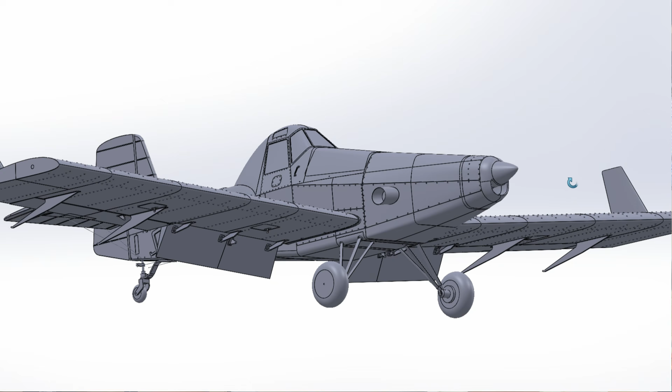In this video we're going to start working on the Thrush, which is a project from Ben Jansen. He gave me the challenge and I want to explore some other stuff to print. And we're going to work on the Harrier.

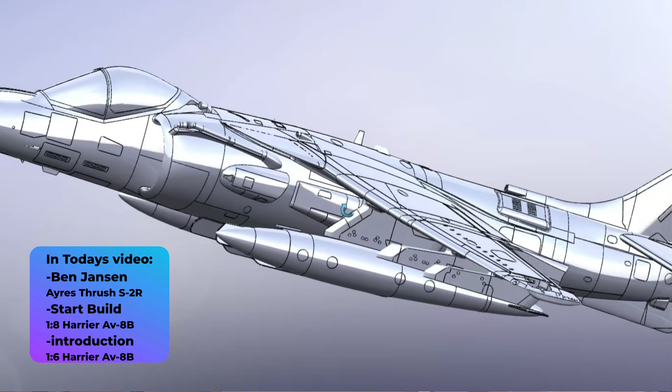The Harrier is going to be a super cool project. I already printed some parts. This is going to be the AV-8B version with the longer radar nose, and it's going to be a 1:8 size, but also a 1:6 size, which will run on a very big EDF.

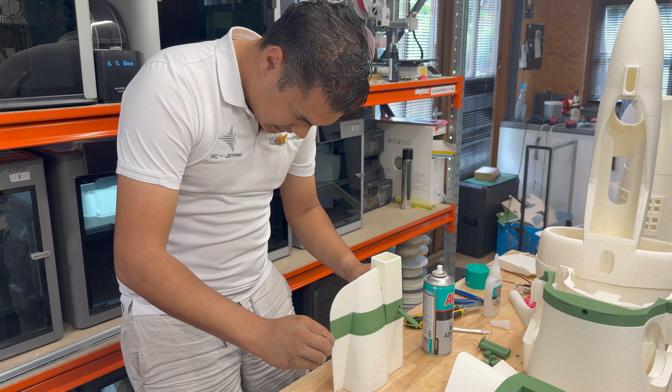And here we go. So, to tell you something about lightweight ASA: it's super lightweight, but also brittle. For all the mechanical parts, I decided to go for PLA CF, which makes it super strong on the mechanical parts like landing gear, flaps, or moving parts.

So for all those parts, we use PLA CF. And for all the lightweight stuff, which is actually paper lightweight, it's just ASA, because the Harrier is a really difficult project. We need to keep it lightweight.

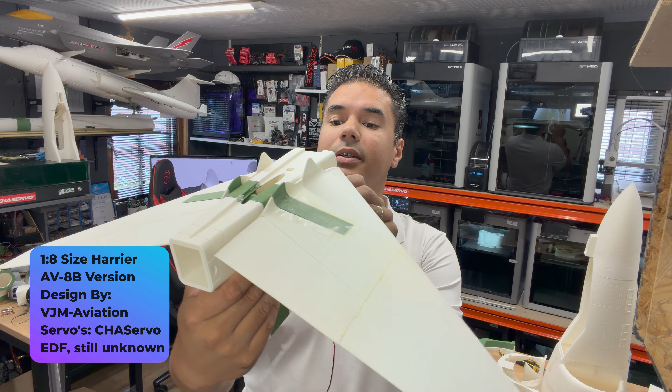So the tail is coming quite nicely, elevators, and they are really super strong. We're going to use the CHAServo DS09. Quite happy. Okay, let's continue gluing some more fuselage parts.

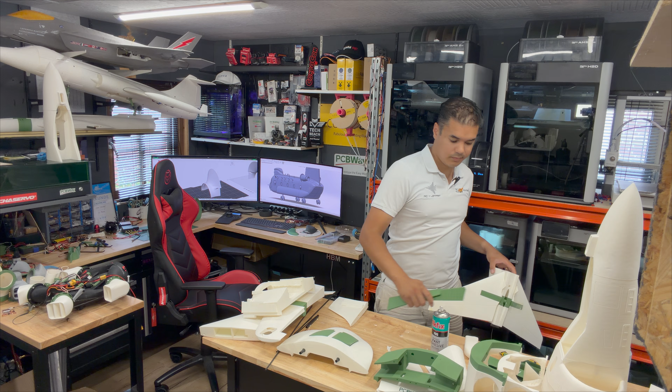Okay guys, we came slowly to a stop because I made some small mistakes. For example, this piece of the wing needs to be carbon. Six kilos of the Harrier model is hanging on this small piece of lightweight ASA.

So this piece needs to be printed out of carbon fiber. This part is super strong. I'm really happy because the tube goes all the way down into the core of the wing. So this part is actually quite strong, but this back part, yeah, I need to print out of carbon fiber.

I'm happy that I still didn't glue it, but overall, she's still very lightweight. And yeah, that's about it.

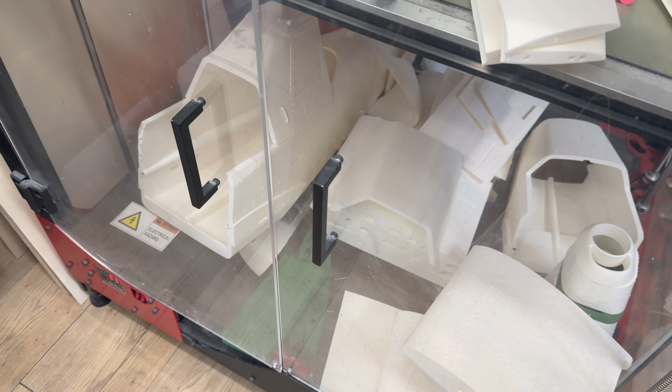Okay guys, we're going to use aluminium CNC cut landing gears. We need really strong landing gears because these are the side legs, and they handle a lot of side impact, so they have to be strong.

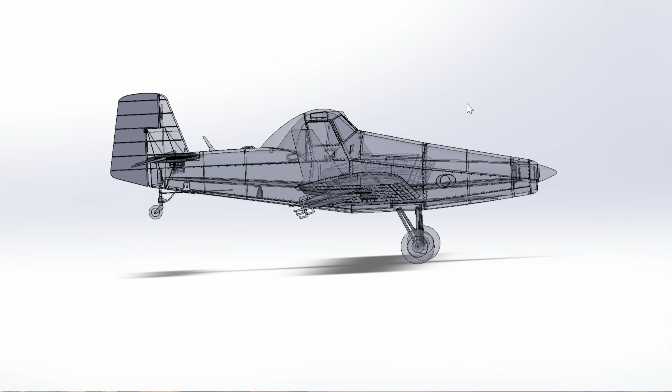Okay guys, let's continue with the build of the Thrush. This is a project from Ben Jansen, and look at the quality of the details. It's going to look really awesome.

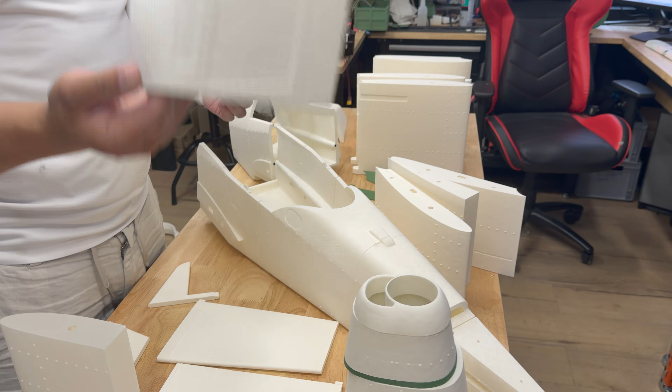We're going to print this plane in ASA material. Lightweight ASA can handle the heat, it can handle UV, and it's quite ideal for sanding easily and making a nice paint job on it.

So let's start gluing these parts together. Yeah, let's see how it works out. Cool.

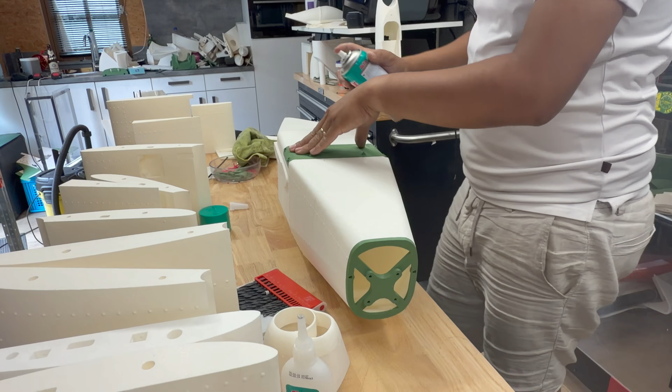So guys, last night I printed all the parts I need to continue with the Harrier build. I know you're all waiting for this project, but the improvements and the mistake I made yesterday are now solved. So this part, for example, the whole entire Harrier is going to lean on this part because this is the fixture of the wing. So let's see when they are finished.

Okay guys, and this is the result of the fuselage build. So next week we're going to continue with the wings.

We're already on the next day. And what do you think about my t-shirt?

That's super cool. So we're going to continue with the Harrier because I printed a lot of parts overnight. But guys, look at the details of this truss model. Cool, eh? So let's continue.

So let's continue with the beating heart of the Harrier, which is the Pegasus. I really love to build this Pegasus as a scale size, as a scale mock-up. It has to be the real thing. We're going to use a big Schübeler for that, which is the 128mm 14S setup.

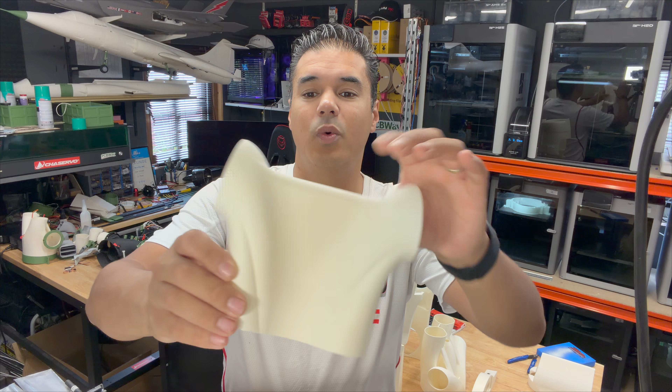I asked you guys on Facebook if lightweight ASA should work, and most of you commented yes. I made a new design which is way more tougher, way more stiffer, but super lightweight compared to carbon fiber printing. So again, more efficiency.

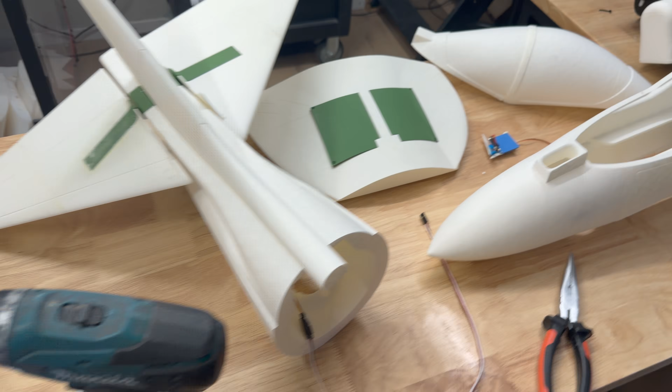So these are the parts which I have so far. Some parts printed overnight. To be honest with you, this is already my second prototype. The first one had some issues with integrity, and I will give you some footage about that.

But anyway, the main landing gear has to be printed with carbon, since ASA is mechanically not strong enough. So also you need to improve the holder for the front landing gear. More about that in a minute.

So it's always great to have support from Richard. Yeah, he's helping me with the KK2 board. We're still going to continue with the KK2 board, but in the future we will swap to iNav. Okay guys, Richard, great job. Cheers buddy.

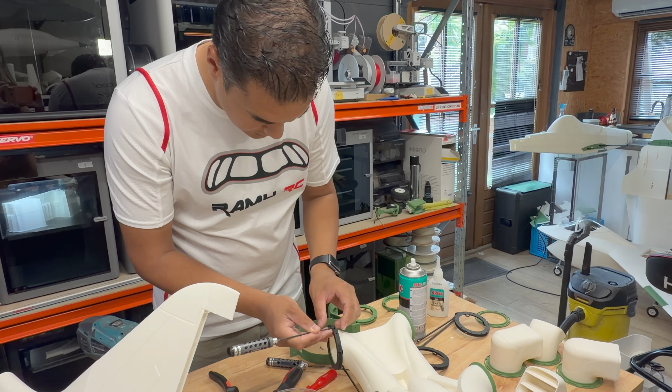Guys, we're going to install over 20 ball bearings to make it operate smoothly during the rotation of the nozzles. This is my concept, how I've done it for years. If you look really closely, those bearings are angled at 45 degrees. And the more pressure you put into this Pegasus concept, the smoother it will run.

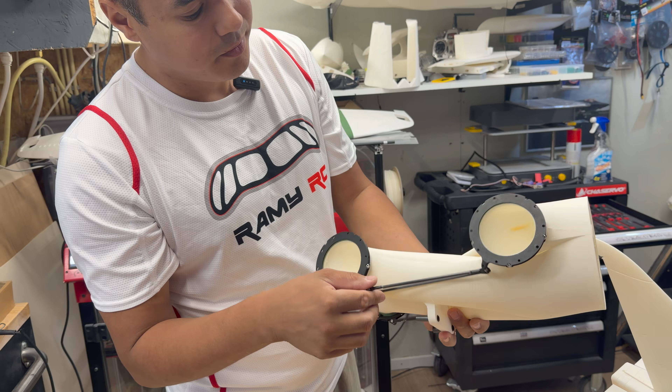Okay guys, we are getting to the end of the video. I just installed all the ball bearings together with Melanie. And next week we're going to continue with installing the nozzles.